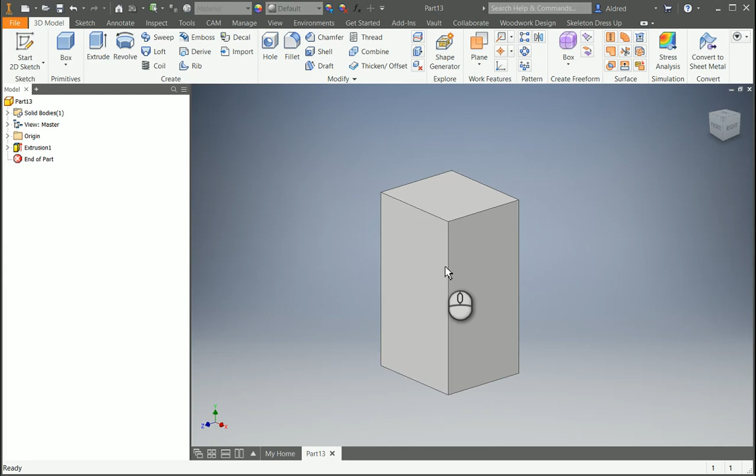I'm going to show you a little bit about Woodwork for Inventor, which is an add-on that has been created for cabinet making.

The first thing that we do is open up a part and create your normal standard box. Then on the skeleton dress up tab, which has been added when you install Woodwork for Inventor, we can start doing our magic. The first thing we're going to do is dress up the skeleton body.

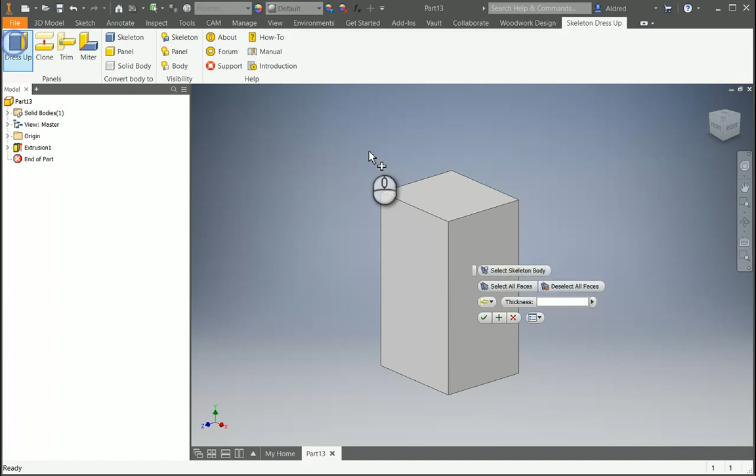The first thing is select the body. It makes it so that I can choose the panels. I'm just going to go all faces, and deselect the front face. You'll see here that you can give it a thickness as well.

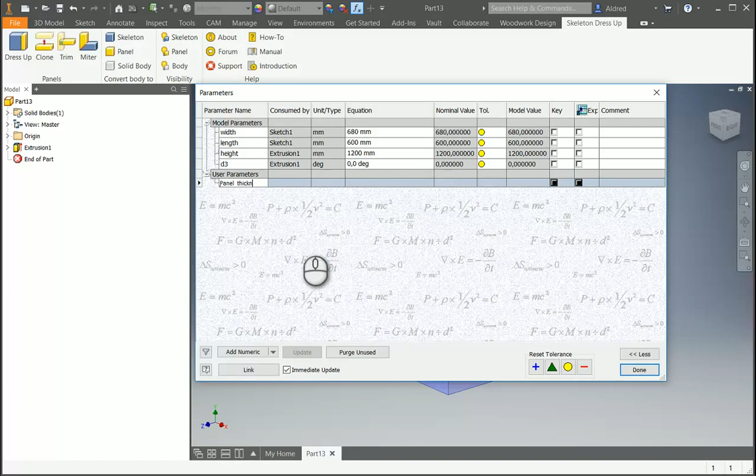What I normally do is in my parameters, I will go and create a user parameter, a numeric user parameter, and I'll make that panel thickness. This just makes it easier for changing the thickness of the panel later on in the design.

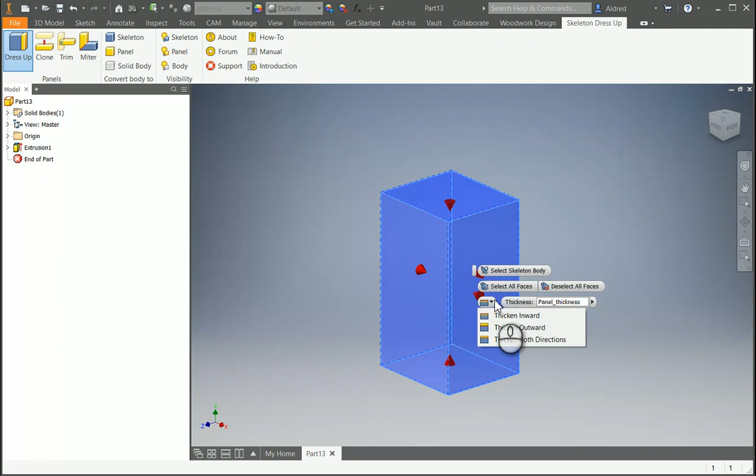So select your skeleton body, and then we're going to select the faces that we want. With the arrows, you see the arrows are pointing inside, so they're going to add a thickness of the panel thickness, which is this parameter. So you can see the spelling counts, matters.

I can either thicken inwards, thicken outwards, or thicken in both directions. I'm going to thicken inwards. Now it's very, very thin because in my parameters I've set it as 1 millimeter. I'm going to go change that to 18. You can see it thickens everything automatically.

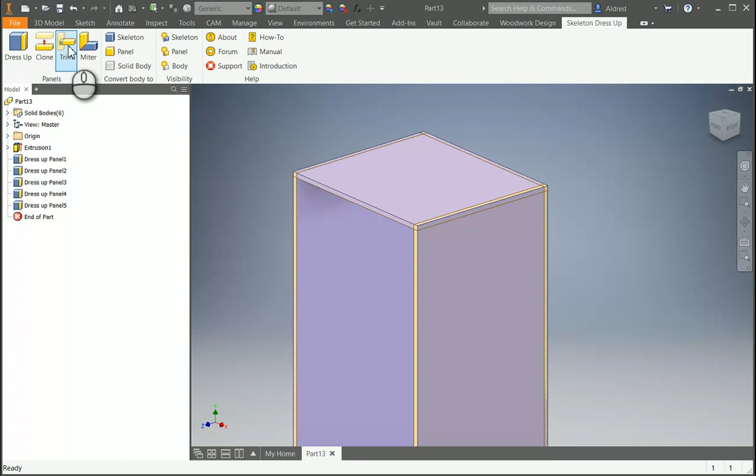Now I'm going to do some modification to the panels. With the modifications, I can trim the panels. So for instance, if I wanted this top panel to be sitting on top of the other panels - the back, right, and left panel - I could say let's go trim these 3 panels, and my bounding box is the one on, and it will then automatically pull that panel down over here.

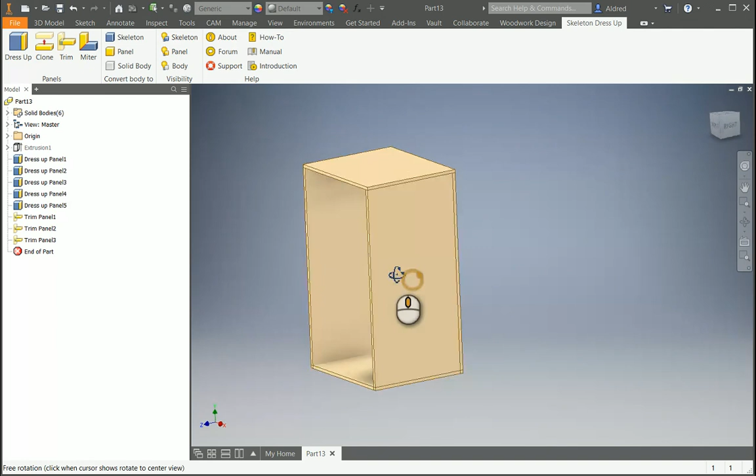For visibility purposes, I can turn the skeleton off so that I can see my panels a little bit better. I'm going to do the same for the bottom. So I'm going to trim these panels over here, and my bounding component will be my bottom component.

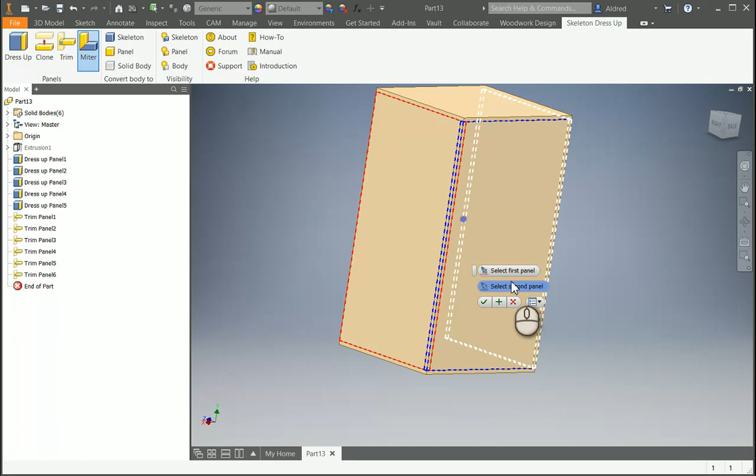The other way that we can also modify these panels is by using the miter command. So I'm going to miter these panels on the left, right, and back. Miter that panel and that panel - you'll see that it puts a 45-degree angle in. Let me take a look at the other side. And then miter that panel and that panel as well.

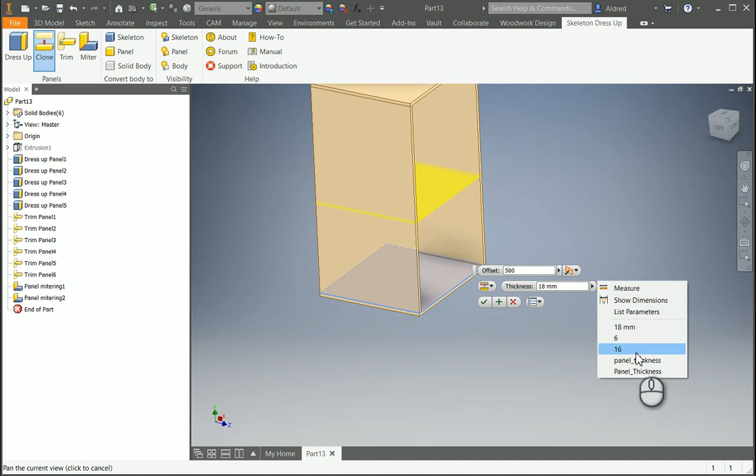We can also create a shelf, and to create a shelf, I can use the clone tool. What the clone tool does is it will offset a panel from a face that you select, and let's say the offset must be 500. Then the thickness, once again, I'm going to say is the panel thickness, so I'm just going to choose that parameter that I created earlier.

Now you can see that it's going into the panels over there on the left and the right and the back. So I'm just going to trim that - trimming my shelf, and the bounding box is the back, the left, and the right. Bounding back, left, and right.

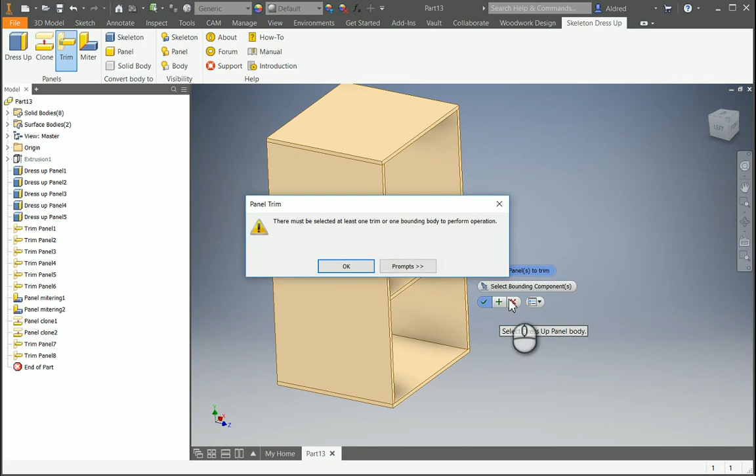And we've completed the procedure. Now you'll notice that up in my top over here, I've got some solid bodies, and it's just automatically named as solid 1, panel 1, solid 1, panel 2, up to panel 7.

I want to go and rename this so that it's more recognizable when I take it into my assembly. So let's make this the left panel. Back panel.

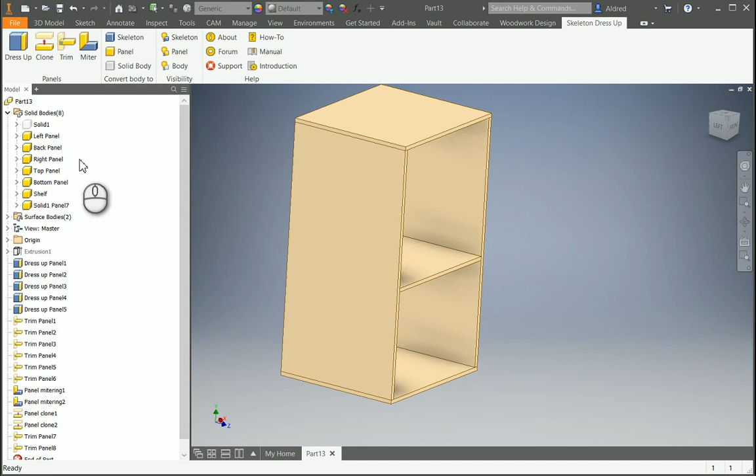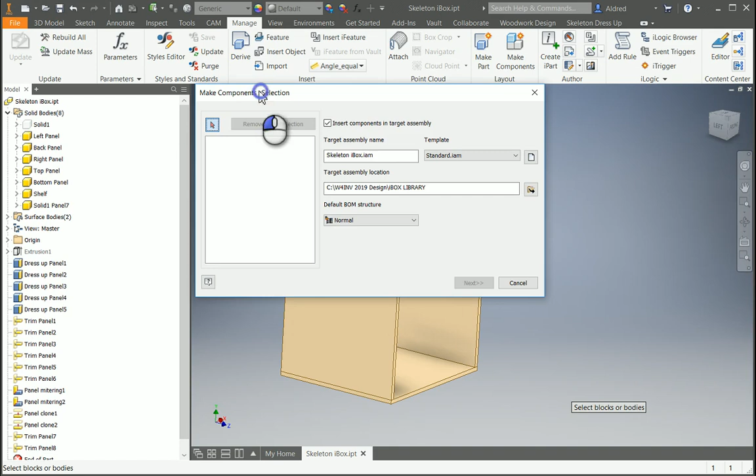Once I've renamed everything, I can go and create parts out of this. Going to my Manage tab, I click on Make Components. I'm saving my drawing over here, and I'm going to choose all my different bodies. It's taken the names that I've just created.

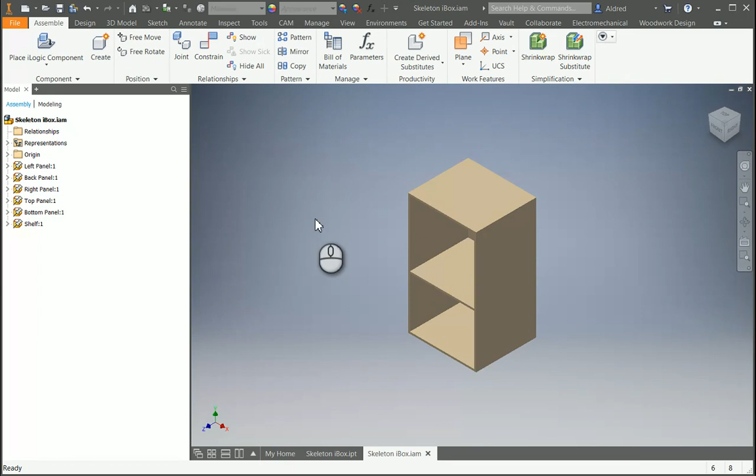Select where I want to save it, New iBox. If it's going to be a different bill of material structure, I can choose that, and I can choose a different file location as well. Once I'm done, click OK. So now it's created my parts over here, and it's grounded them around the 0,0,0, my origin. Now I can go and start applying materials to it.

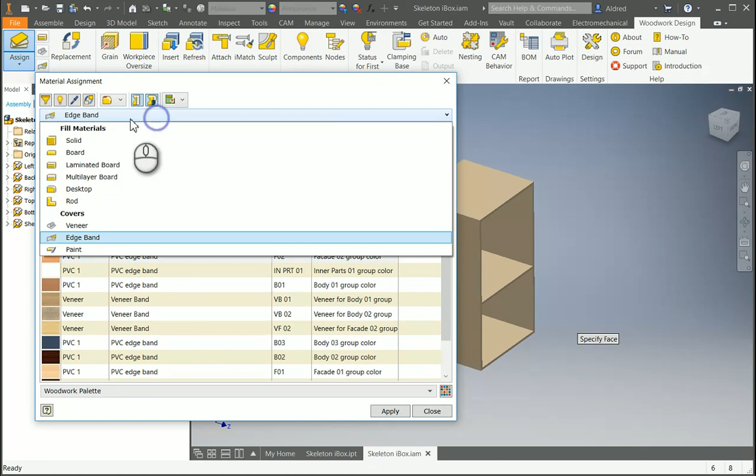With my materials, I go to my Woodwork Design tab and assign materials over here. So we've saved the part, and now we're going to go assign the materials. I'm just going to assign the same material to all the parts - laminated board, LMDF, that's fine. I'm just going to select everything and click, then it goes and applies the materials to that.

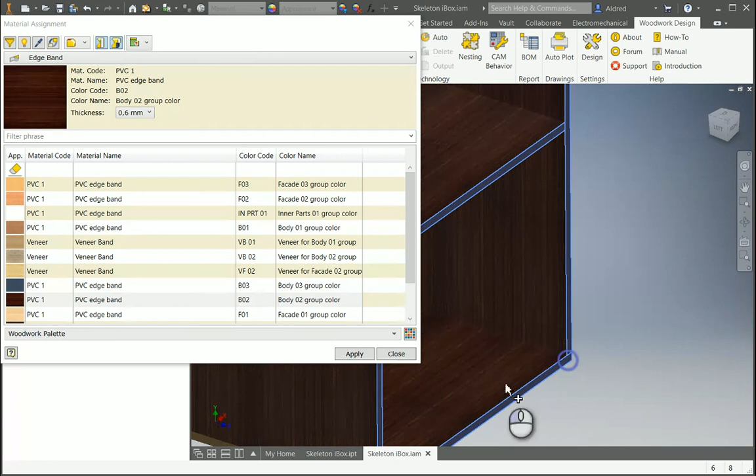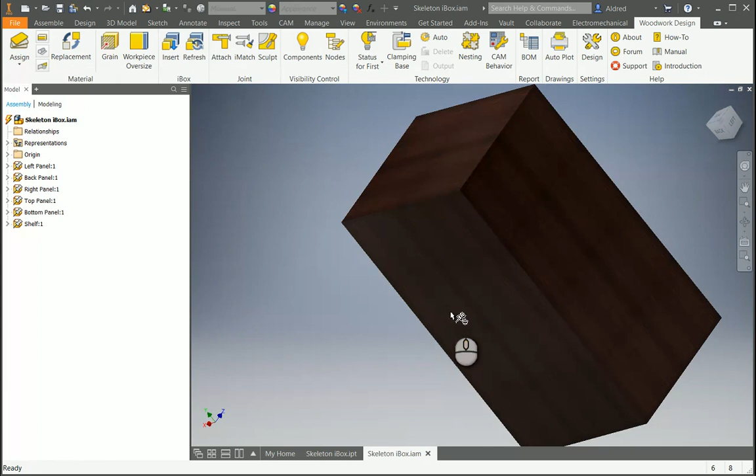What I can do now is also put on some edge banding. Let's do PVC edge band over here, and choose the faces which I want to apply the edge banding on. Once the edge banding has been applied, just finish this up over here. So the edge banding has been applied and all the materials have been applied as well.

So once I've done this, I'm now ready to create an iBox from this component. To create an iBox, I'm going to go to my Manage tab and select my iMate. So I need to apply some iMates to this. Selecting iMate, I need to apply a flush mate, and also give it a name.

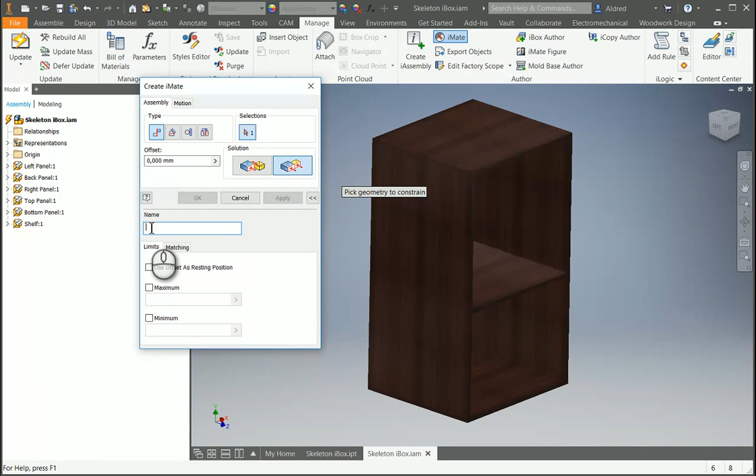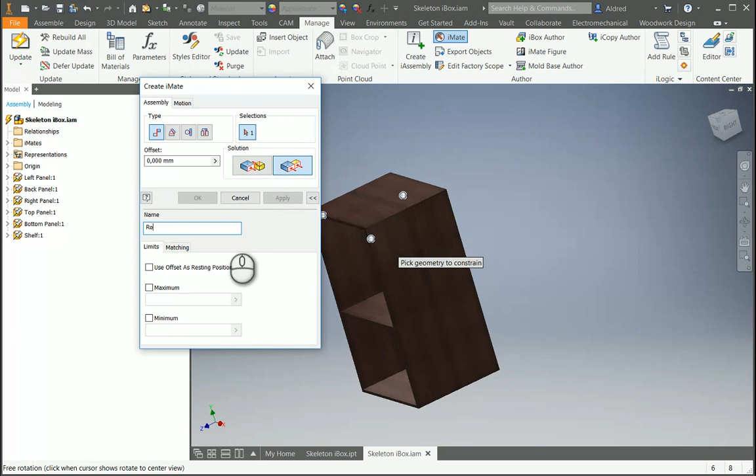I'm going to say top, which will be that top over there. Apply. We're going to have left, front, and right. And you'll see that my iMates have been applied in my folder over here.

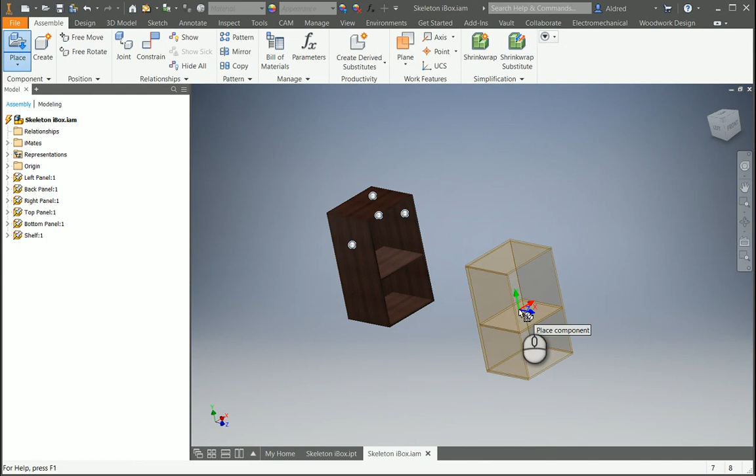Once this has been done, I can author this iBox. The skeleton file name that I'm going to put in here - before I do that, I just need to go and place my iBox skeleton in here, which is my skeleton iBox, and place it grounded at the origin, and then rename this as skeleton.

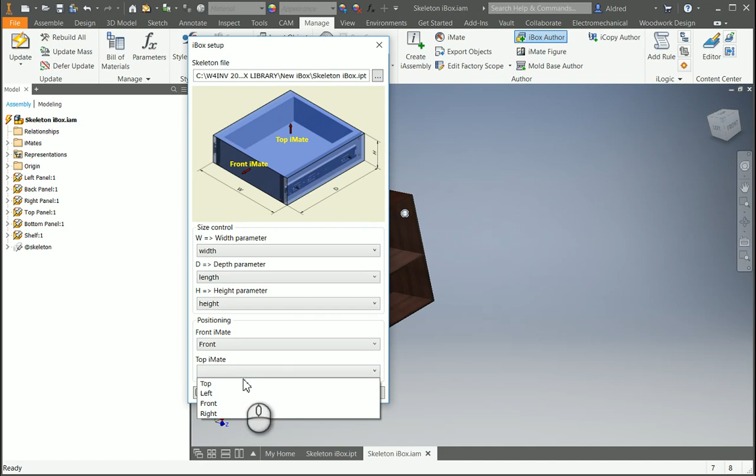Now I can just change the visibility of that to be off. Going back to our Manage tab, we can author the iBox, select your skeleton file, and then have your width, your depth, and your height. Select your front iMate, select your top iMate, and then click OK. So there we go, we've now created it. Now let's see this in action.

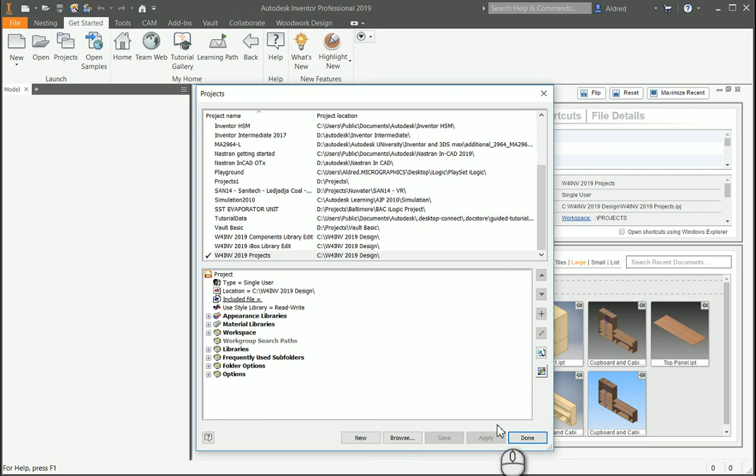So I'm going to close down my assembly and my parts, and change back to the projects. By the way, when you are creating iBoxes, you need to activate your iBox Library Edit project. So I'm going to go back to my Woodwork for Inventor 2019 projects and open up one of the samples.

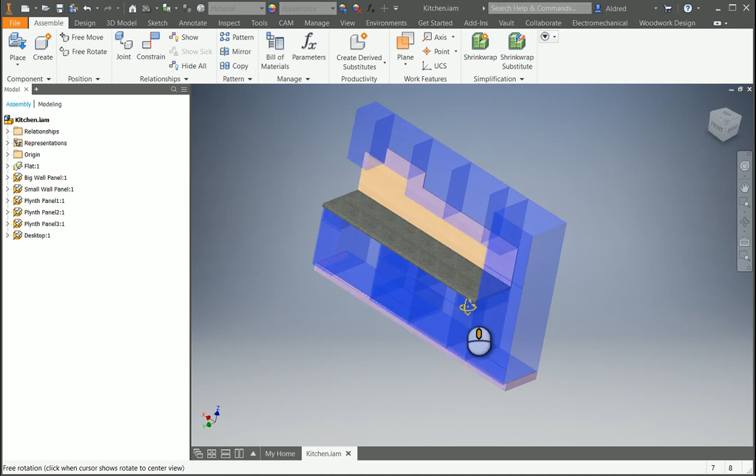So when using the iBox, you'll kind of create the concept of what you want it to be. So I've just got all these different shaped boxes or sizes of boxes. And what the iBox will do that I've created is conform to the width, the depth, and the length of these different size boxes.

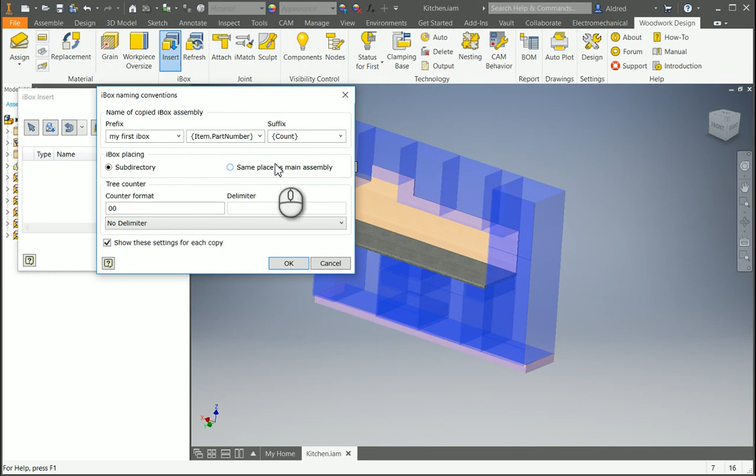So going back to my Woodwork design, I go to my iBox panel and insert, and I'll go and choose my component for my iBox - the new iBox that I just selected or created. And then it allows me to go change the name, put a prefix, an item part number, suffix. So leave it as the front, top, left, and right of the components. I don't think I saved the iMates, that's why.

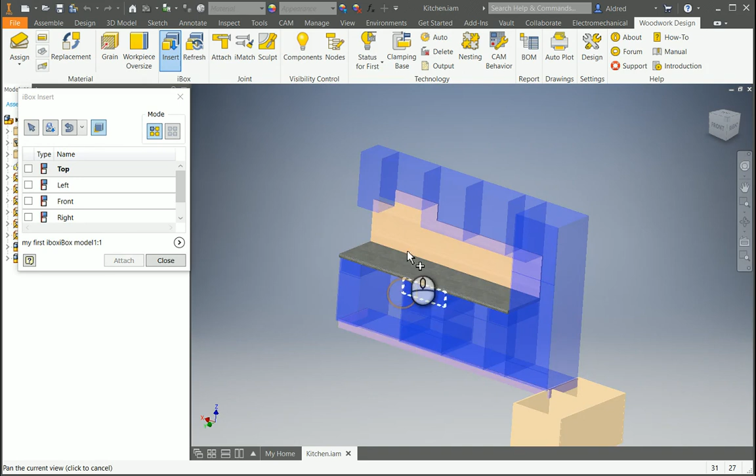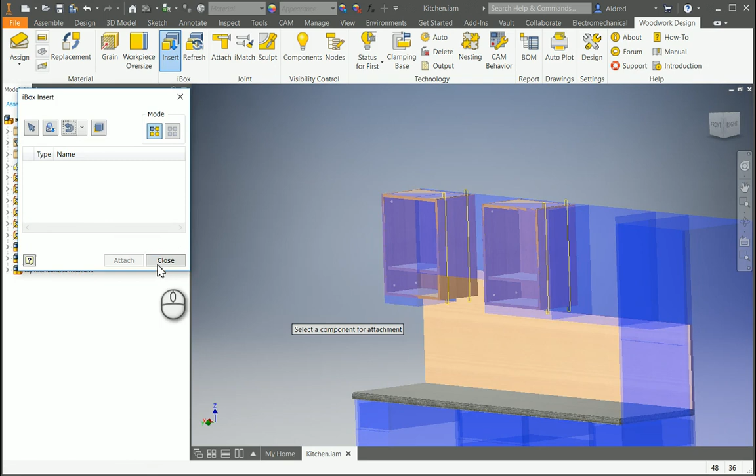Let me just go choose another one quickly. After it's been loaded, you can see there, I've got that in there. I'm going to choose the geometry, and then I choose my top, my left, and the front. I want to go put another one in just to show the differences with it - so top. And then let's just go and refresh the iBoxes. Now you can see that very quick and easily, I'm able to create different sizes of the same.